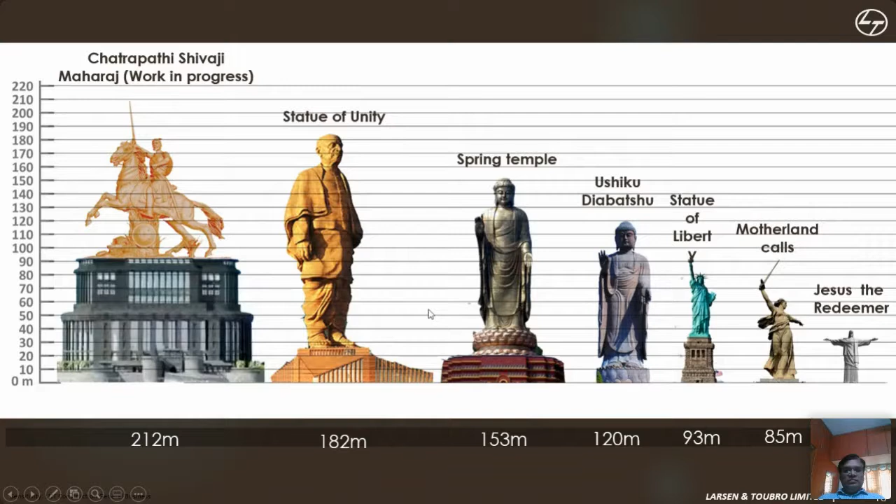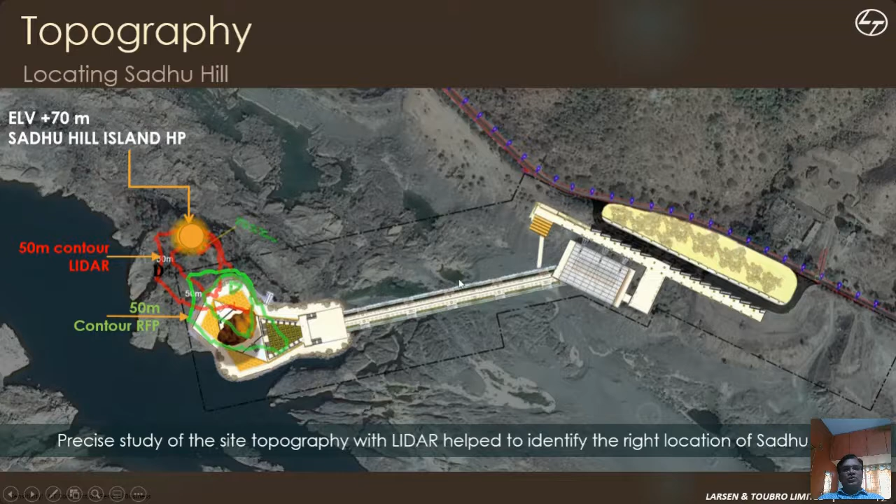When we conducted the LiDAR survey of the entire river bank and the statue, created the record and started looking at the hill itself, as per our survey record it got shifted by almost 45 to 50 meters from the original location. That also posed a lot of challenges for orienting and locating the statue, and aligning the approach bridge with the proper coordinates and orientation. That was a challenge for us to carry out and conclude.

As I told you, the project is not on plain ground. It has hills around these areas, and the dam is upstream. The dam gates were on hold due to various political reasons, so during the heavy monsoon the river used to flood, there was a lot of erosion and uncontrolled river flow. So we have a terrific irregular river bank, and a lot of things eroded like this.

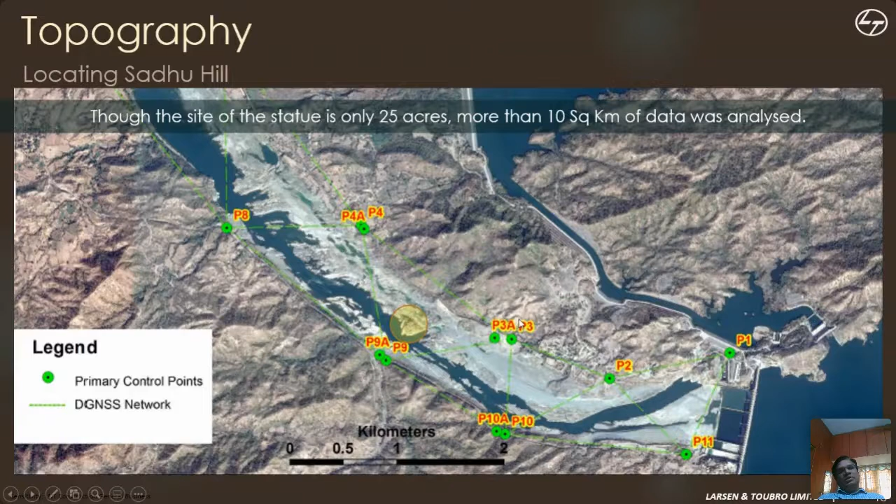So we have conducted a LiDAR-based survey for this entire river bank. Sorry, the site is 25 acres, but we have conducted the survey for almost 10 square kilometers, including 6 kilometers of road. Data was generated, and we arrived at the profile of the river bank, riverbed, all the things.

If you see here, we have conducted a lot of road surveys, because the road was running along the river bank, a topographical survey for the entire river bank, a hydrographic survey and a riverbed survey to carry out the feasibility of boat navigation from the hotel site to the statue site. We have conducted very rigorous surveys, all these different types.

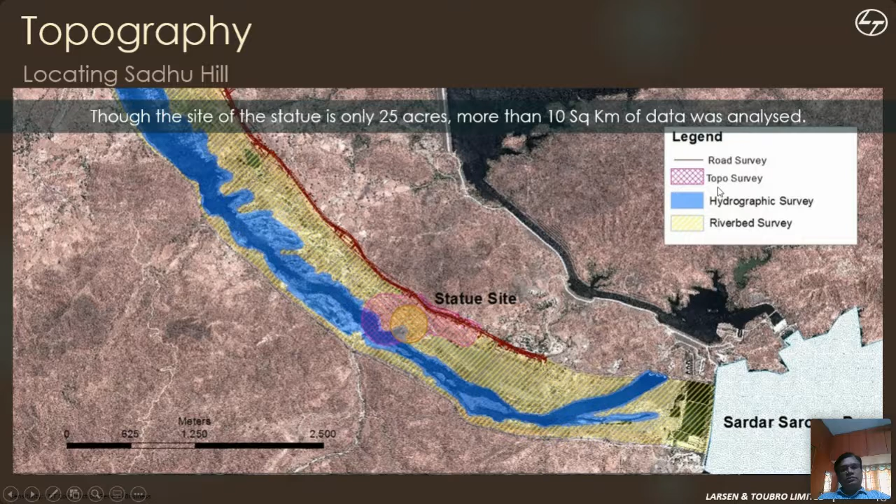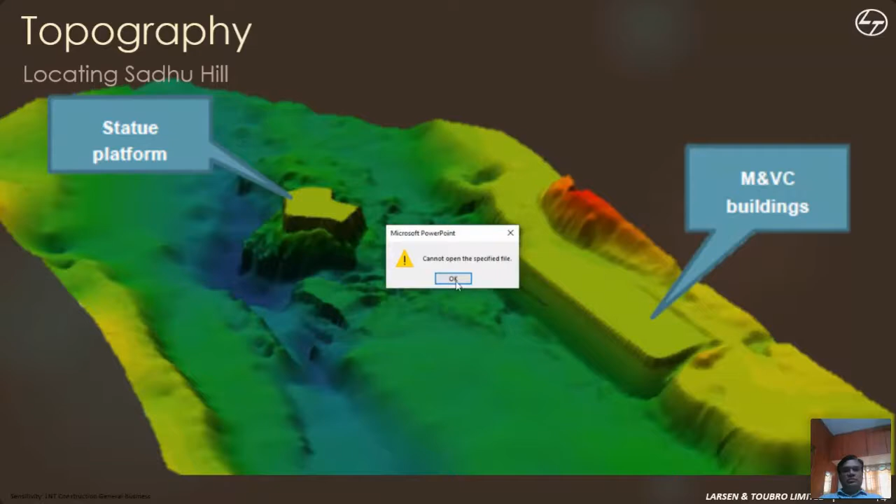In addition to this, another challenge: we conducted a shadow analysis of the statue at various times, so when visitors visit, they should be able to see the face and body of the statue without any shadow. So we did a shadow analysis over a period of time, how the statue will be visible in the daytime for various seasons, in June, September and December, to see whether the statue can be seen without shadow. Otherwise, with shadow, you cannot see and enjoy every profile of the statue.

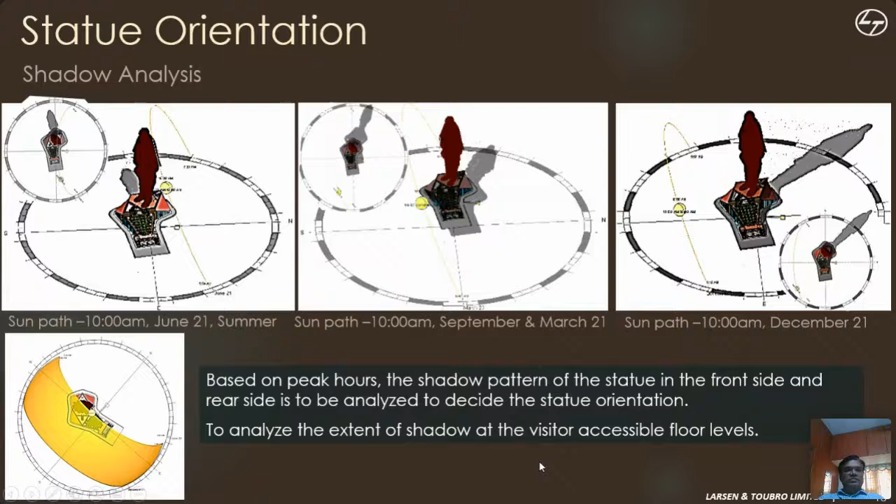Since this is a very sensitive topic, what we are capturing and putting out to the public is not for a few days or few months; it is going to stand forever. So to take care of this sensitivity, we conducted various studies right from August 2014 to May 2017. I will run through these stages.

There was an image presented in the tender document. They selected Sardar Vallabhbhai Patel at the age of 62, even though he lived up to 75 years. That image was suitable to give character to the work he has done, all the things.

Then to support this, you can also see there is a statue at the entrance of the Ahmedabad airport. We scanned that statue, and we created a 30-feet-height statue using the sculptor. The sculptor we selected is Ram Sutar. He is a Padma Bhushan awardee.

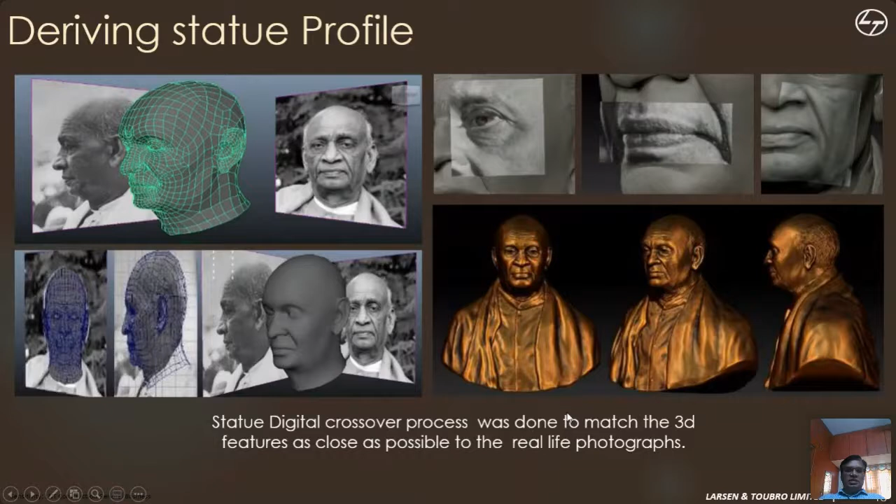We hired them for this special work. You can see the 30 feet statue scan, the original 2D photo, and the Somnath statue - these three compared together.

Along with this, the 3D digital crossover is superimposed to check whether everything fits the image - the ears, lips, nose, and every part of it. You can see all the things verified, discussed, debated, and aligned for the betterment.

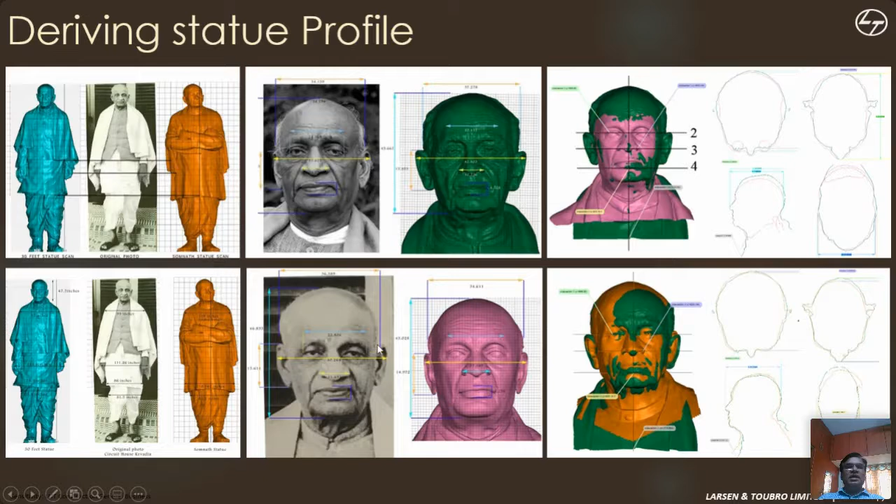So much of the team is entirely dedicated to ensure that everything is perfect.

Some of these stages were undergone for the faces. You can see Ram Sutar standing near this 1:5 face markup. This is a 1:5 markup - you can see that if expanded 5 times, what is the height of the head itself, the actual head, shown in this 1:5 scale markup.

The person is standing nearby in the left side image. So from the original to this refined version, the eye size, nose, lips, and ears - whatever is seen - every care is taken for refinement.

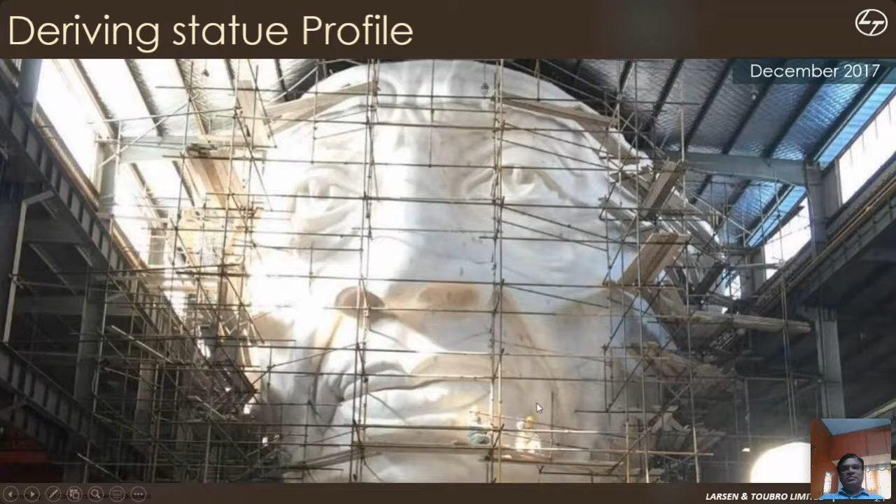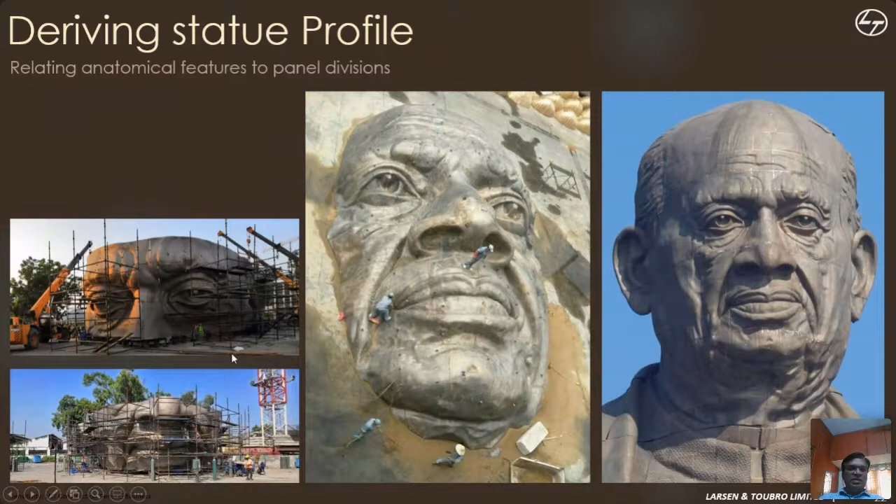This is the FRP true scale markup carried out in the workshop in China. This is the real size foam markup, and you can see this from foam - they derived and took out the face element. You can see this with the human height, and some of the locations you can see how it looks.

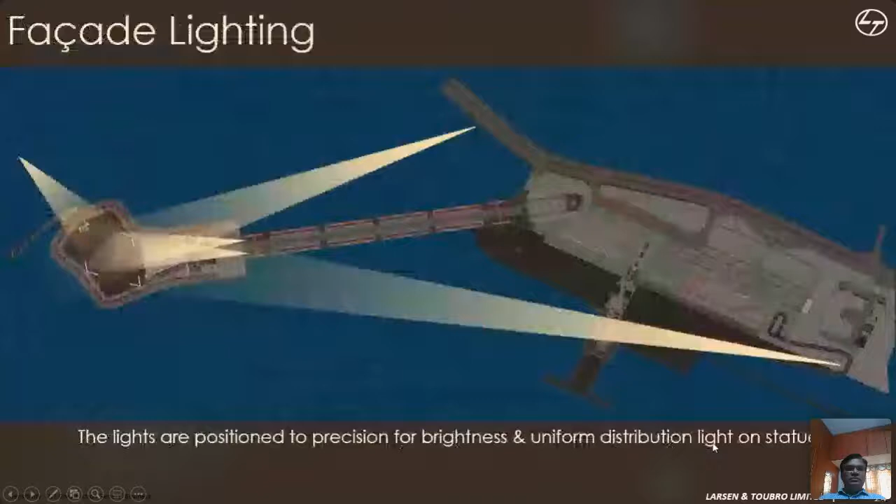This is another one of the activities, such as the Mammoth height statue. Also, we want to lit during the night time. So you would be able to see this light location we identified. You can able to see the light array is coming from various spots, even 500 meters away from the statue, so that it will reach the full height of the statue, to get the uniform brightness of the statue.

These are some of the views. We have put this focus light, the various intensity, and as I told, from 450, 500 meters away, to get the uniform light over the statue without any shadow, in spite of so many projections and parts over the statue body.

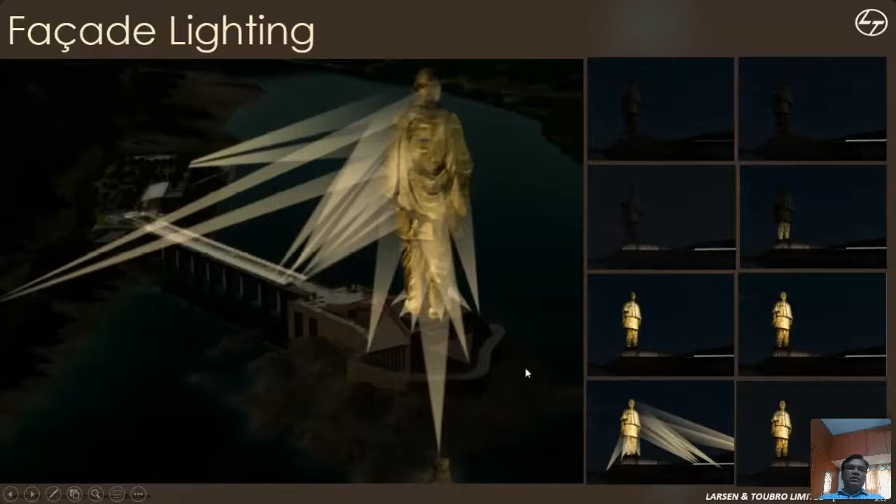So this is one of the views, this is during night time, with in addition to this the facade focus light. So you are not able to see where this light and all source is coming from, but you are able to see this statue in full, very clear, without any shadow.

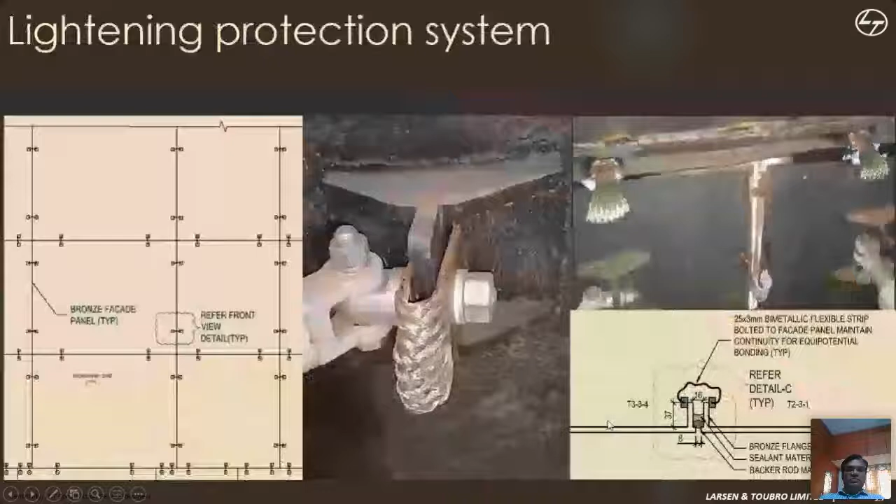See, this statue, this outside skin is almost like 23,000 square meters of metal area. That too, we have put it on this hill surrounded area. Maybe this hanging clouds and the lightning effect may be very critical for the statue. So that's why we have done lightning protection of the statue, even though such a metal exposed area is there, almost 22,500 square meters. These are all connected and well earthed.

So even if people are touching during a lightning strike, they will not get affected. Within a fraction of a second, the current will connect to the Mother Earth, so that the people inside will not get affected. This is one of those small issues, but it is like a high risk potential. We have taken extreme care connecting all these panels and earth to the Mother Earth, so that the occupants or visitors should not get affected during a lightning strike, if at all anything strikes.

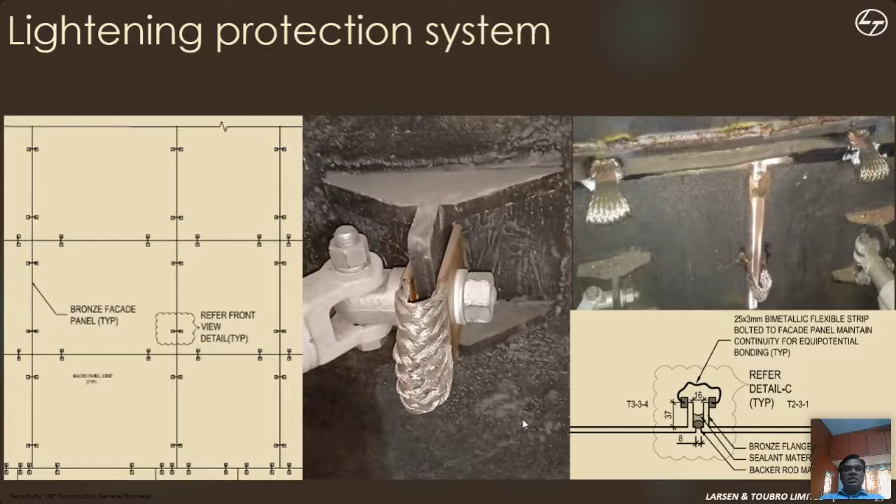And also in hot climate, if the ambient temperature goes up to 40, 45 or so, such a large metal area will attract a lot of heat, and the space inside, the entrapped air may get heated up. We have done a CFD analysis that showed if entrapped air is there, the heat may go up to 85, 90 degrees Celsius. So you can imagine if visitors are inside during a summer day, how they would feel.

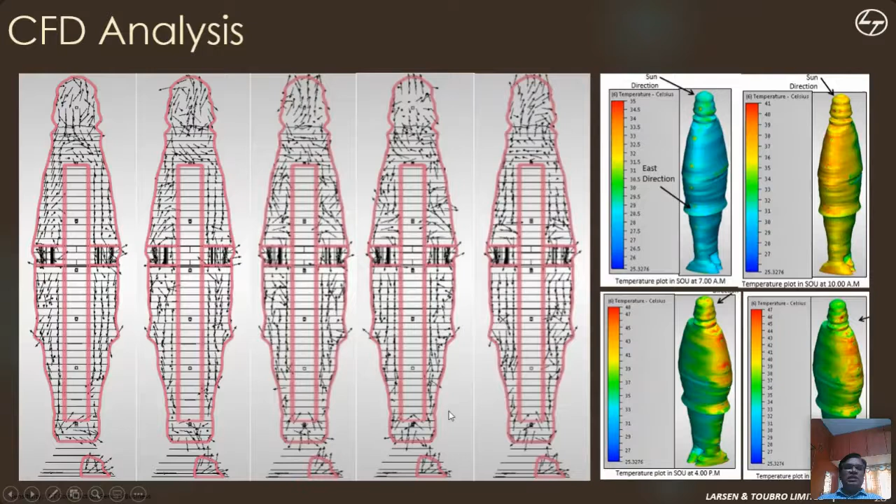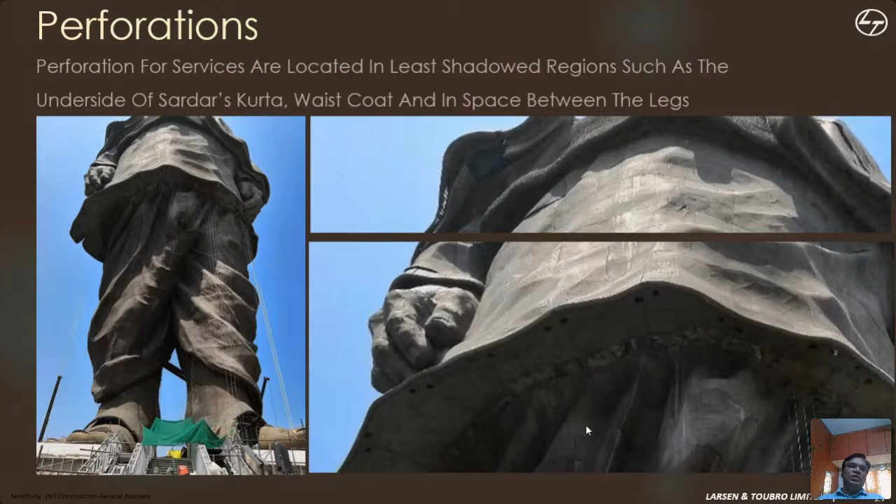So what we have done is create some kind of vent at underneath, and also vent at the top wherever possible, so that there is a natural draft, so the air can enter below and escape at the top. Wherever the fold is underneath, we have created some kind of perforation under the fold and elsewhere, creating natural air entry, so that hot air gets lifted up and goes outside through the ear or nose or near the top head level. That kind of analysis is also carried out.

So further to that, I want to mention this project is designed for 15,000 visitors per day.

The viewing gallery is located at the 153 meter height chest level, with a capacity of almost 2,000 visitors per day anticipated. It is designed for earthquake resistance and wind load up to 180 km/h speed.

To reach this viewing gallery, we also provided two high-speed lifts of 4 meters per second, one in each leg, connecting from ground level to the viewing gallery level.

As I told you, this left side photo shows the hill. Because a natural hill needed to be cut off terrain, we also had to investigate whether the soil or rock is suitable for putting such a gigantic statue.

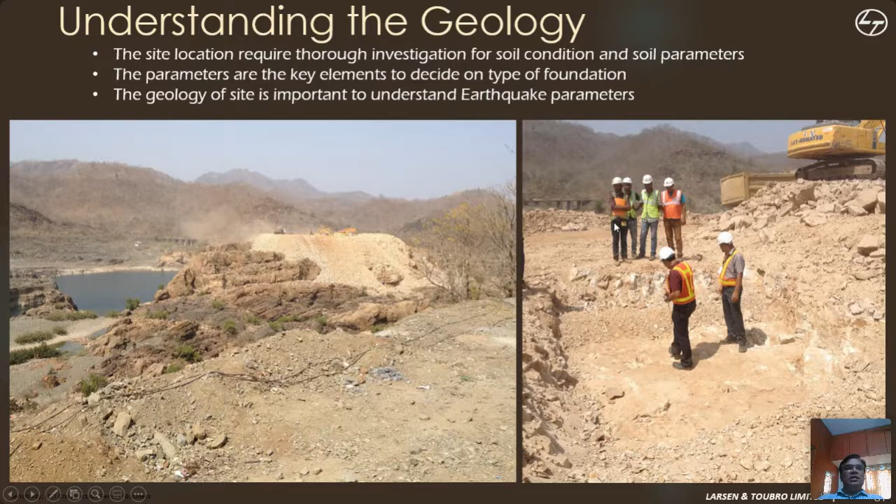Also, this zone comes under earthquake zone 3. So we conducted a very detailed geotechnical investigation with a lot of boreholes, more than 60-75 meters deep, and also some cross boreholes to understand the underneath layers and how they transition from one to another.

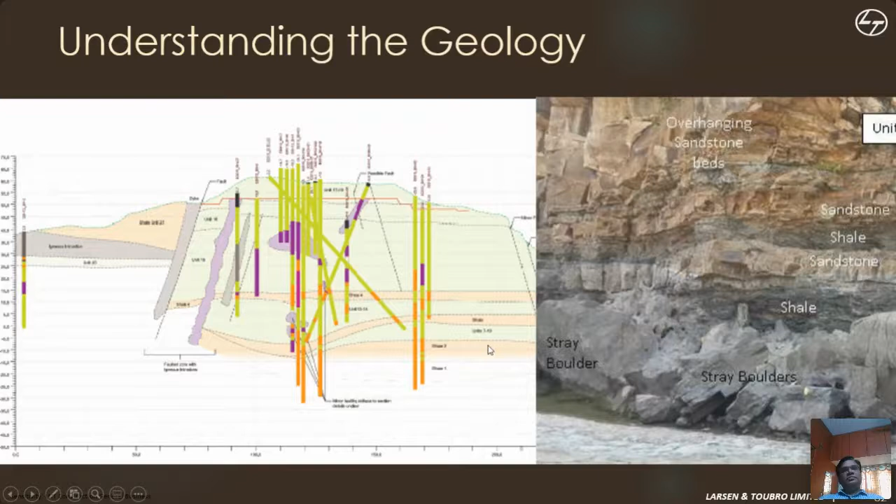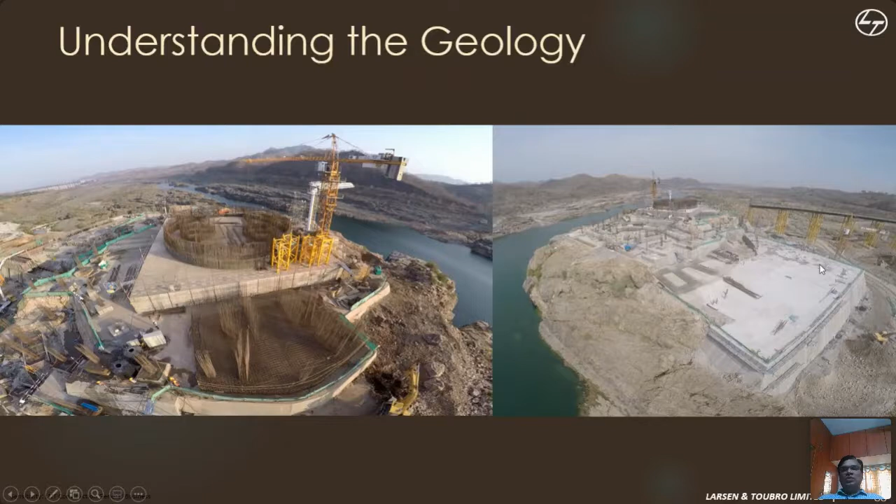Since this is a monument structure, the design life anticipated is more than 100 years. To meet this design life, the type of material used, cover to concrete, reinforcement, grade of steel, and all such things were taken with extreme care, along with whatever durability tests were required, even during construction, with necessary precautions taken.

One example is for the raft concrete, we lowered the pouring temperature itself by adding ice, so that the heat of hydration should not create unnecessary internal thermal cracks. This entire mass is monitored and insulated with insulation material to avoid temperature differences. Extreme care was taken in all these things.

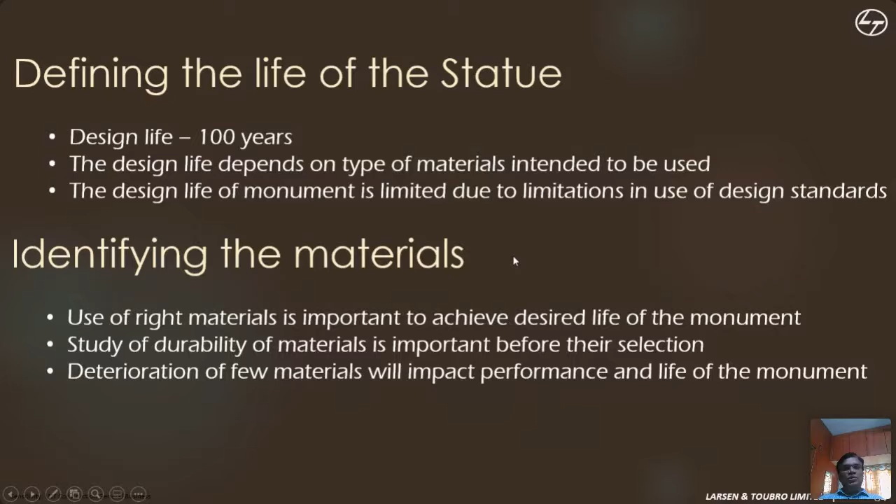I'm not getting into all those construction-related things, otherwise with the short time available, it would be very difficult to capture everything.

The design parameters followed for this project: for seismic, the project comes under zone 3, however we designed for zone 4 to create an additional factor of safety of 1.5. For wind, as per code it is 39 meters per second wind speed, however the project is designed for 50 meters per second to create another factor of safety - in addition to the regular factor of safety, we created another 1.71 factor.

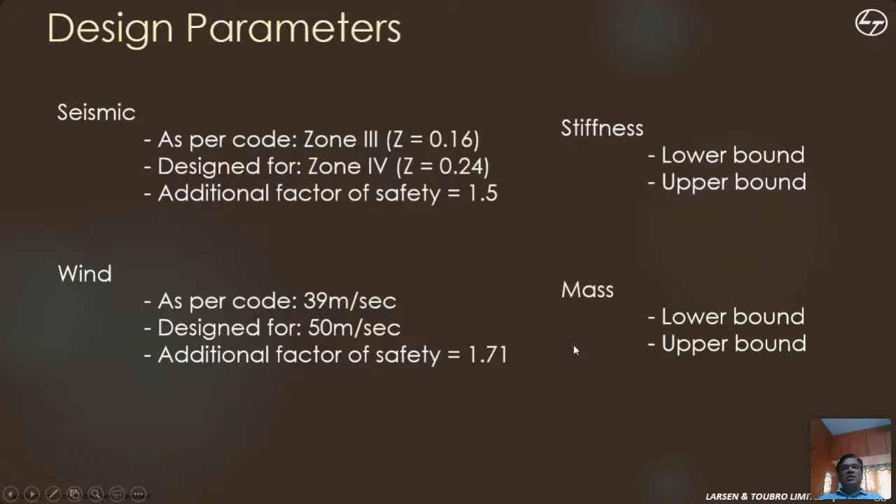We also did a rigorous analysis using finite element analysis - lower bound, upper bound stiffness, risk analysis, so that nothing should go wrong. Similarly for mass, lower bound and upper bound were calculated for wind analysis. This kind of risk analysis was carried out to ensure the structures would not be at risk due to extreme seismic, wind, or any event.

Normally the code gives wind load for regular conventional structure profiles, either square, rectangular, or circular. For a human body like this kind of irregular shape, it's very difficult to define what kind of wind pressure comes over the structure. So we conducted a wind tunnel study.

This model was developed at 1:400 scale with the surrounding environment within 500 meters, including all bridges, surroundings, the riverbed and everything. It was put in a wind tunnel and tests were carried out for every 10 degrees using a rotating table that can rotate at every 10 degree increment, for different orientations of wind. The test was carried out for structural loading as well as facade - facade meaning the external pressure that needs to be considered for designing the entire skin.

For various elements of the statue, the foundation is M60 grade concrete, and other concrete varies from M65 to M40 used in this project. We used structural steel of E350 grade, and the bronze cladding is 8mm thick, made of a bronze alloy as I told you.

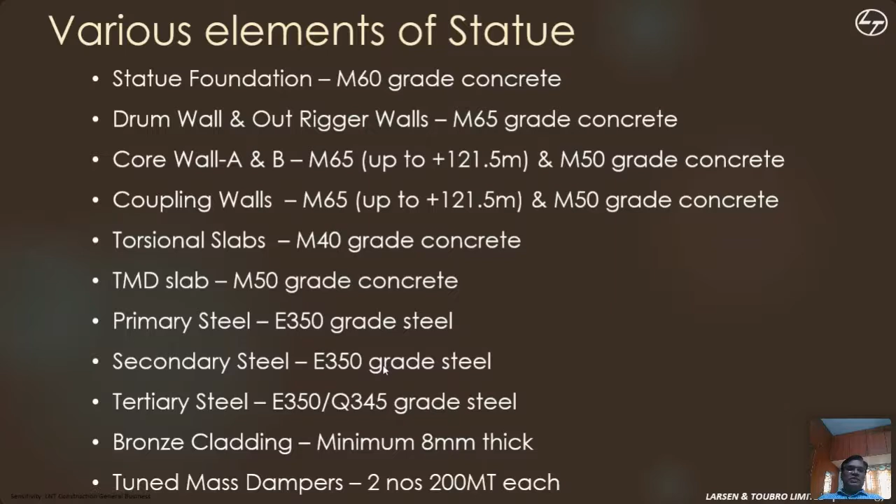Yeah. This is the statue base. Yeah. Dinagaran? Please, you can go ahead.

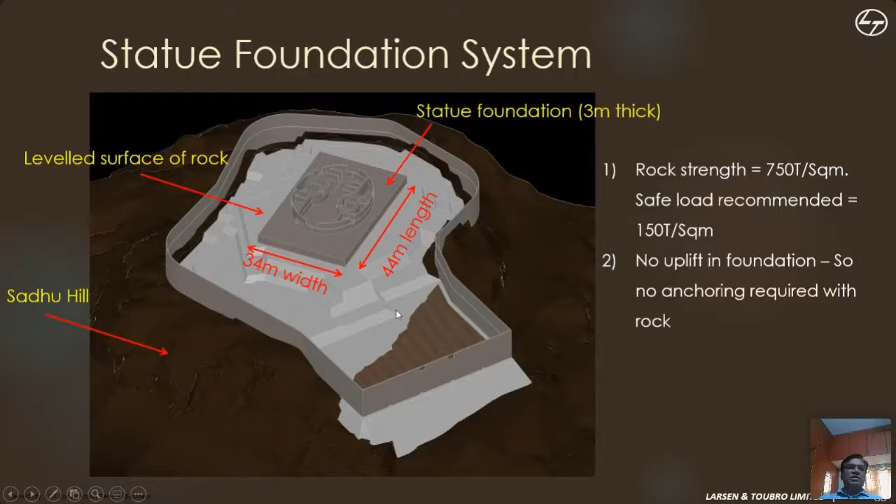Yeah, fine. Yeah, this is a statue base. This is the raft foundation of 34 meter by 44 meter, and this base structure with the retaining wall. This is located with reference to the hilltop, with a bearing load of 150 ton per meter square. This is what we established during the geotechnical investigation.

Because when the statue sways or leans due to the lateral load, the outer skin should not act one above another. It should not get into compression and tension. We have created a defined gap so that this skin will not get unnecessary additional stresses. So that's why even this steel structure is not continuous.

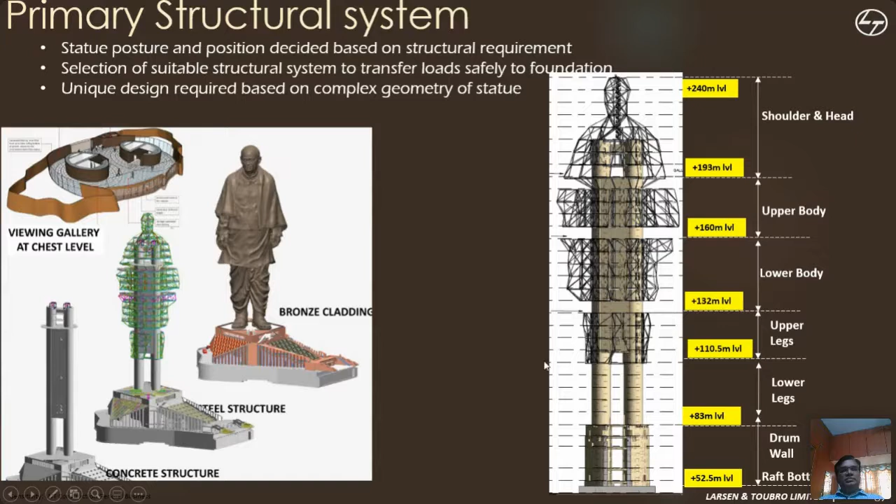The left side view is this drum wall, where the 2 cores are interconnected with the bigger elliptical outer core for better rigidity. We have created this up to the 83 meter level. Above 83, we have 2 elliptical cores, one core in each leg. We made the core itself elliptical so that it will fit into the ankle of Sardar Patel. It houses 1 lift and 1 fire escape staircase.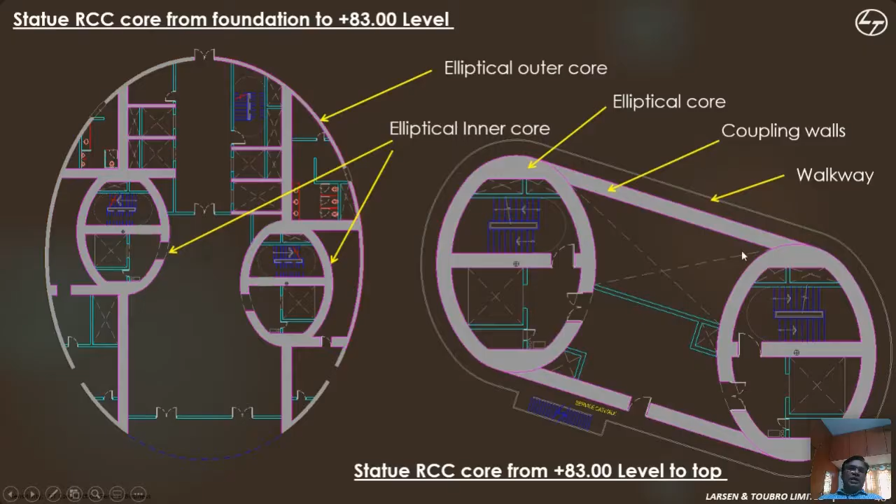The lift moves at 4 meters per second to reach from ground to the viewing gallery. These are all concrete elements. So in the central view, it starts from 58 meter. Up to 83 there is the statue base and drum wall, above that the independent cores, and it goes up to the 240-meter level. These are the project reference levels. From 58 meter to 240 is 182 meter.

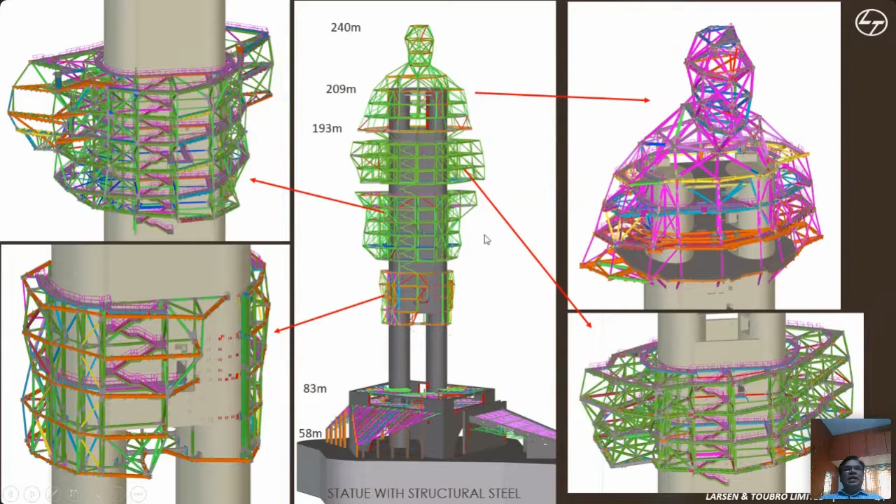So you can see how this steel structure is created, including the head portion. Within the head skin we have created the steel structures. Such a complicated, non-orthogonal, irregular pattern. Erecting and aligning it in space is a big challenge for us.

So this is one typical section of the statue profile. The width, the front elevation, is almost 60 meter, and the depth is almost 40 meter average at the maximum chest level, with 2 cores inside, and a connecting wall and connecting slab so we can go from one core to another. This outer profile is not orthogonal. Everywhere there is a fluidic form.

So you can also see this. We placed a tower crane inside one of the cores, and also added another tower crane outside, braced with the concrete core, for erecting the steel and the skin. And erecting and removing the tower crane itself is a big challenge.

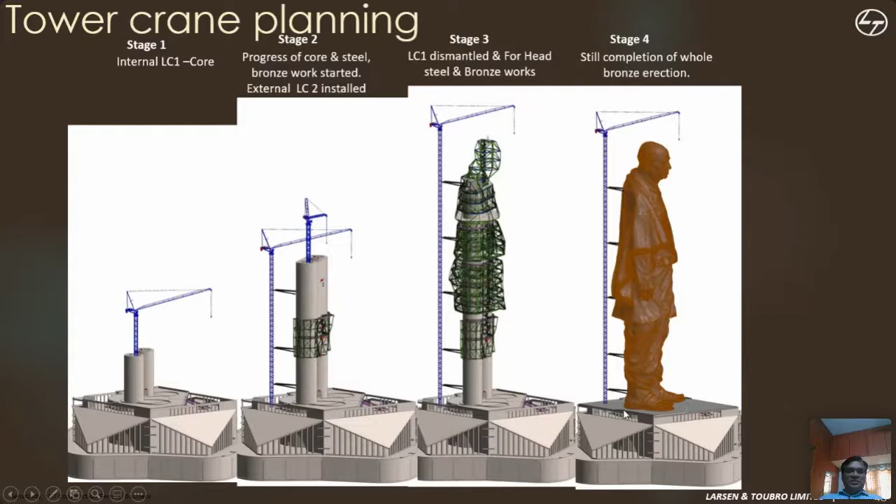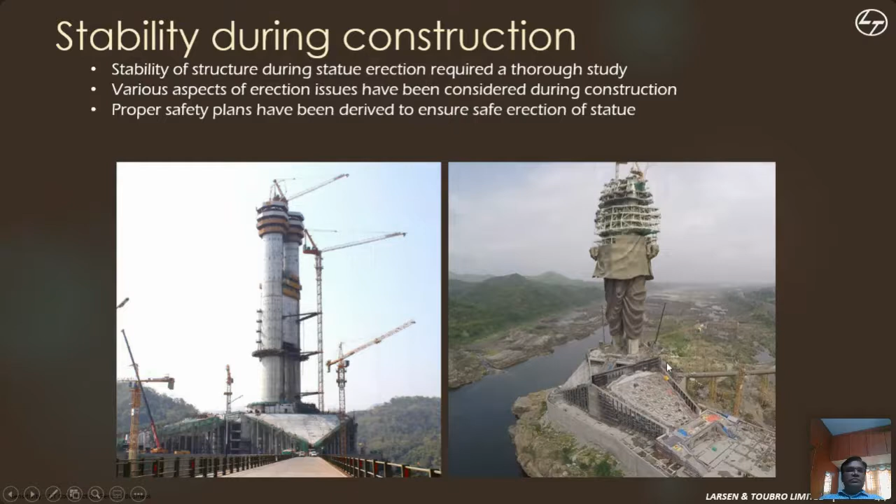If you see any other statue in China, it has a small slit opening, but we have created this very large opening, so those who get into this viewing gallery are able to see the surrounding hills as well as the dam and everything. On both the front side and the rear side, we have created such nice, large viewing glazing areas.

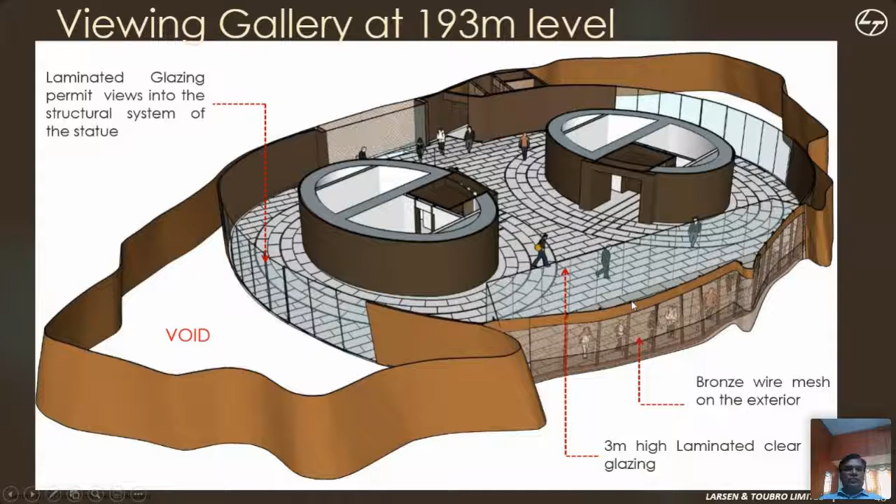See some of the views. We also created this, which is like the skin jolly. On the right side, if you see, there is glazing, and the air-conditioned area is inside. So we have created an exterior atmospheric feeling. If you come here, you can also feel the outside air and everything. You can experience that kind of outdoor environment we created at the 193-meter level too.

And you can also see on the left side the jolly we have created. At human viewing level, eye level, we have created a bigger jolly. At the top and bottom, we have reduced the size so that it merges with the outer skin. So obviously it will not get noticed at the chest level, because it doesn't create another hole kind of thing in the human body.

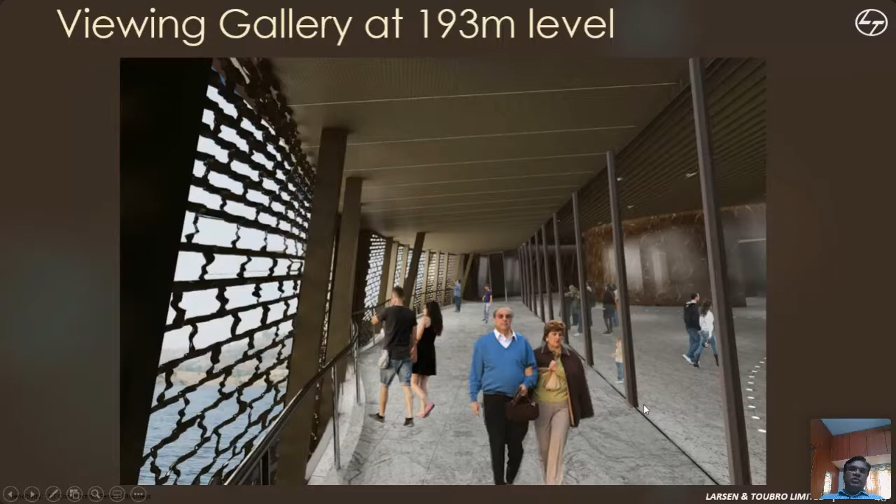We have taken a lot of care and we created a mock-up of this jolly for the visual aspect, and it's nicely done. This is one of the greatest things in any statue, such a large area for people to see outside. All other statues have very small vents for looking outside. You can hardly notice it from the ground. You cannot notice these viewing galleries at chest level. We have taken extreme steps to camouflage them within the outer skin.

As I told you, the bronze area is almost 22,500, equivalent to almost 3.2 times a football playing area. You can imagine such a large area. It is all cast in micro panels of size 1.83 by 2 meters. Eight to nine panels are grouped together as a macro panel, attached to a backside steel frame for handling, and assembled one above another.

I'll also show you. We have done a lot of tests to validate the quality of the bronze to ensure the quality is consistent, because this is a very sensitive alloy material, 8 mm thick, and it is sand cast. So a lot of sensitivity is attached.

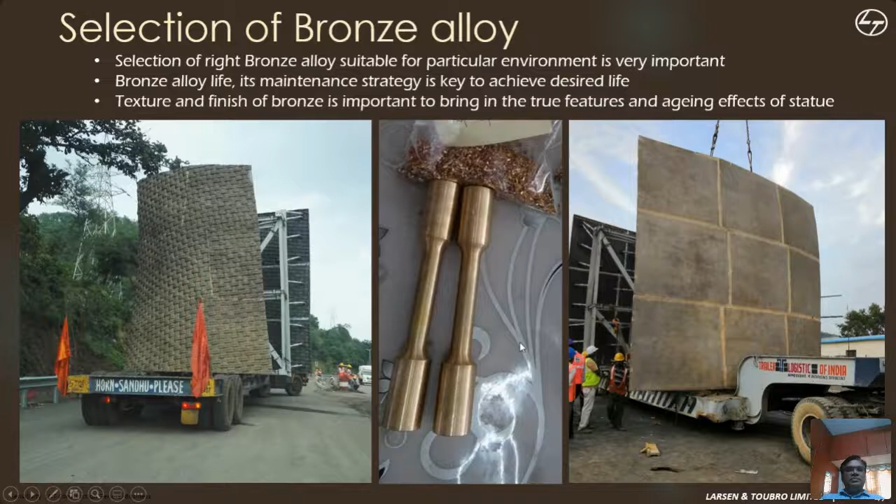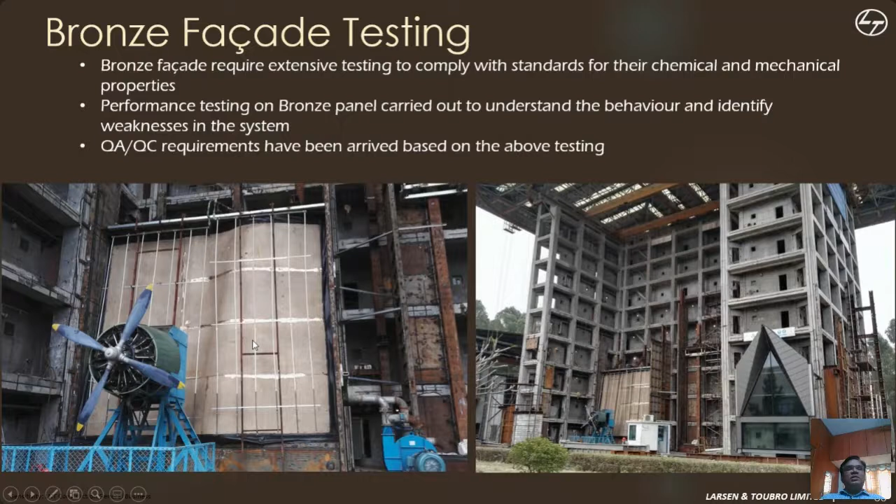Because this is a new material with an irregular pattern and different support arrangements, we conducted a full-scale test in China to study the behavior of the skin, the internal support arrangement and everything.

This is the panelization of the entire body of the statue. It has almost 550 macro panels of size 5.5 by 6 meters, and the cast panel is 1.83 by 2. So each macro panel has almost 9 micro panels. So you can imagine, almost 550 macro panels with an average size of 5.5 by 6.

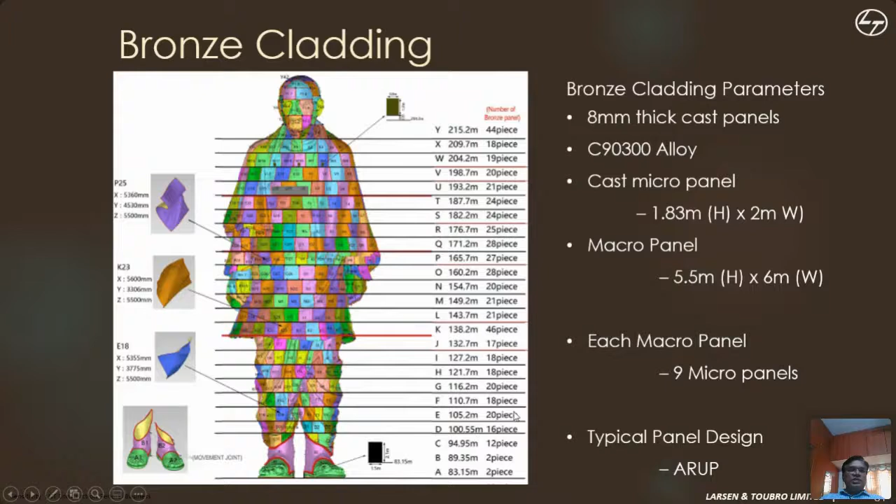This is how the entire panelization is done on the statue. If you see, this is the front side, then the rear side, the back side and everything. Even the face, how it is divided and assembled, you can see all of it here.

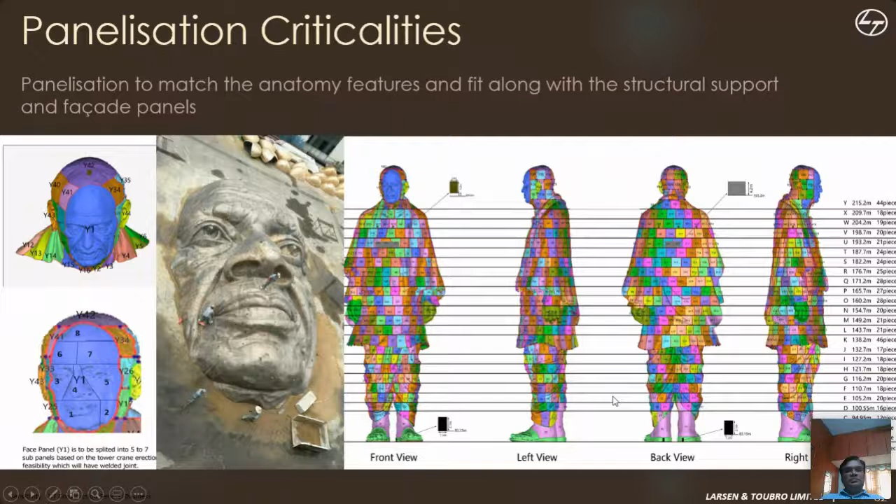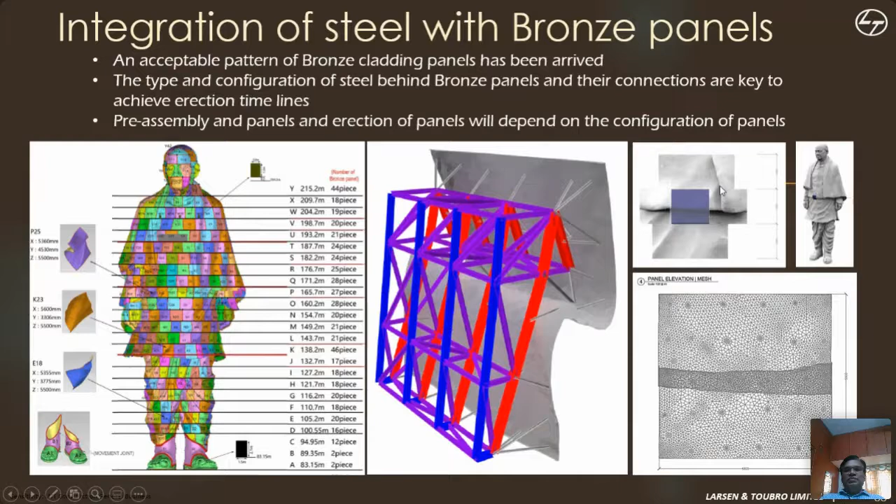As I told you, this is the micro panel and macro panel; this is one macro panel. It is connected with turnbuckle arrangements like this. This is the skin, the turnbuckle arrangement, and you have the backup steel frame. So this is one panel, made into pieces like this. This is the location of the interface of the top cloth to bottom, identified like that.

So you can see the skin with a turnbuckle arrangement of the prop, then the structural steel base. You can see here a closer view. This is a bronze panel. There is support, a turnbuckle arrangement to adjust this prop, and the steel frame inside. And also you can notice the junction between two panels has a return, with sealant applied here with the backer rod, so that water will not enter inside the statue.

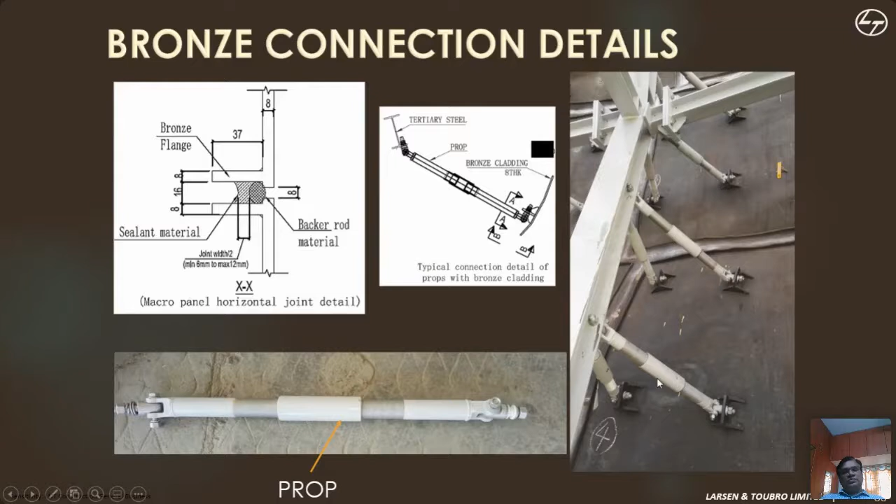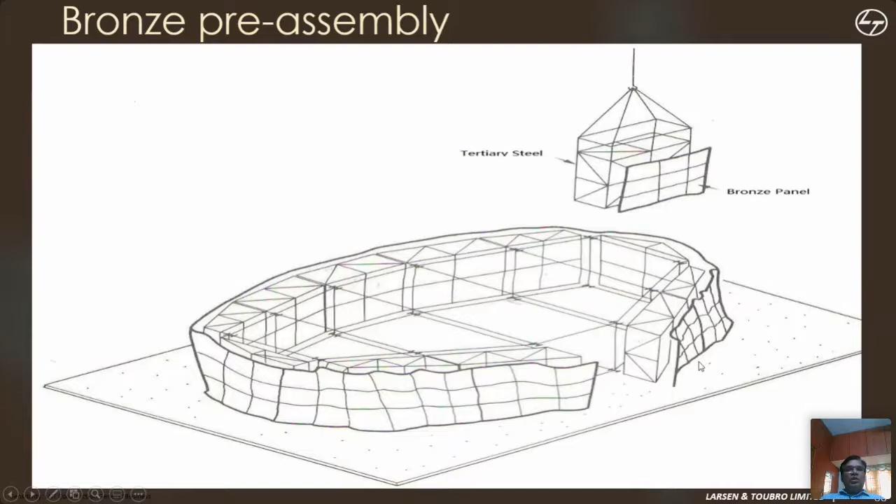As I told you, this is one ring of this panel. What we have done is, first the bronze micro panels were assembled into macro panels, with the prop support and steel frame assembled at the ground with all the survey marking, checking whether it's fitting or not, all checked at the yard itself before lifting and erecting in position.

You can see here this is on-field assembling. Each macro panel is aligned adjacent to each other with the actual profile of the statue and checked and verified for alignment. If any modification is required, it is carried out at the ground level itself, and alignment is done. After that, one after another, they were lifted, transported and erected in position.

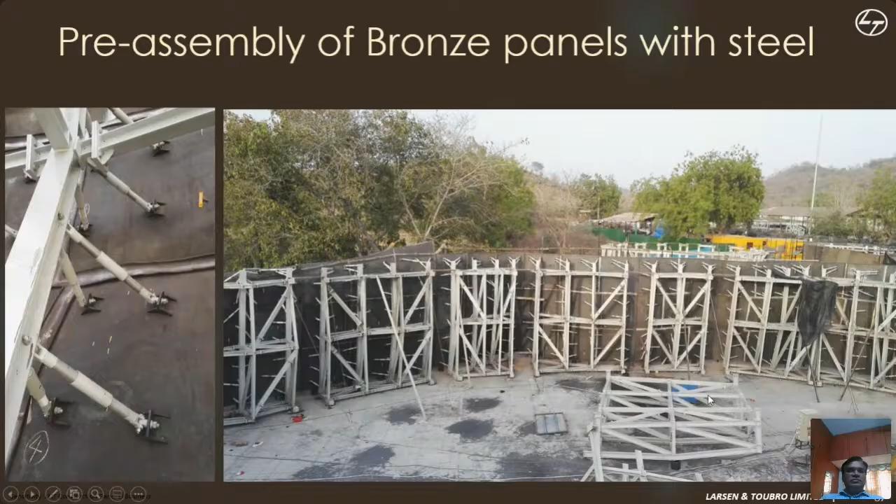As I told you, we have done two tuned mass dampers. Each is 200 tons, mounted just below the head level, at the top of the core wall. This is a hanging mass. The system is tuned to the statue's natural frequency, so that when the statue starts swinging in one direction due to lateral load, the hanging mass swings in the opposite direction, counteracting the natural loads. That's how the tuned mass damper is designed. Two, one over each core, were designed and installed to control floor vibration, for human comfort, and to give additional safety to the structure.

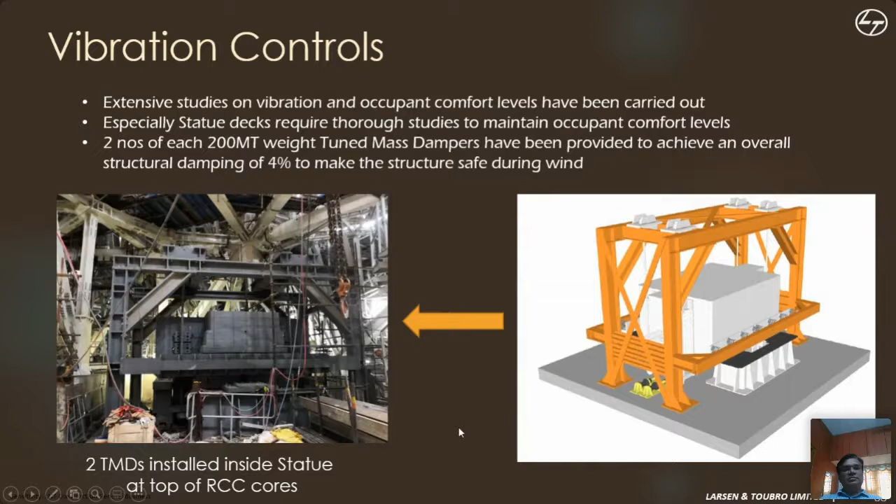In addition to that, we have installed a lot of triaxial accelerometers, temperature monitoring instrumentation, digital inclinometers, and surface mounted strain gauges to monitor the behavior of the structure.

Just a minute. Hello. Yes, sir. Yes, sir, I'm in the middle of things. I accepted 12:30, sir. We'll have it. Okay, correct. Hello. No issues, sir. Sorry, sir. Some important call has come.

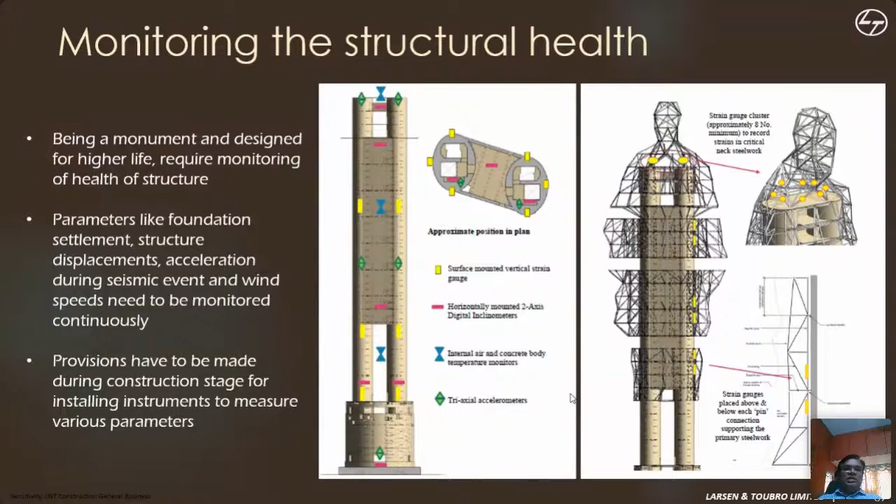So we have also done a lot of instrumentation in the statue to monitor its behavior during wind and seismic events. That's connected to a central server, and it is monitored, so they can understand the level of deformation, stress levels, and if any abnormalities are happening. All these things can be monitored.

In addition to wind load and actual loads, we also studied accidental loads like bomb blast and small aircraft impact. All these studies were carried out to see how safe our structure is. For these accidental loads we also studied and discussed internally with the client how our system is resilient to these kinds of accidental loads.

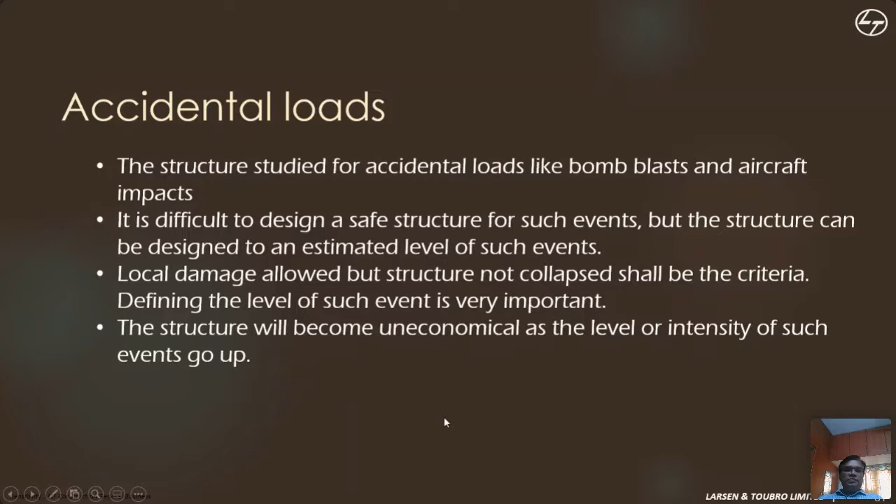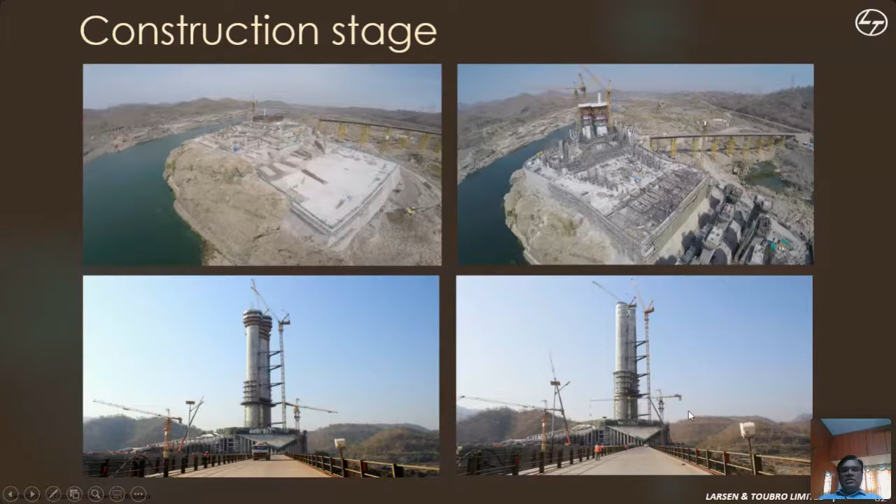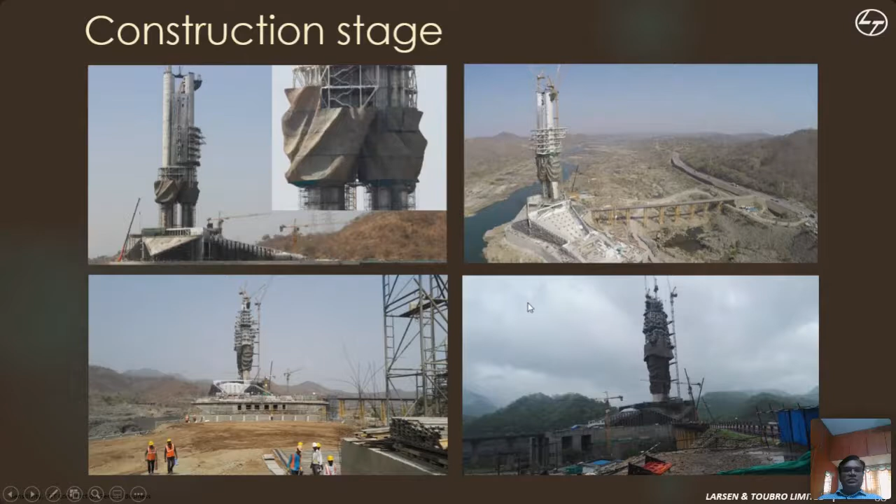These are some of the construction stage photos. You can see the left corner is the terracing level of the statue base, some of the core in progress, the core midway at the left side corner, and the steel work just initiated at the base level. In some of the other photos, the lower level bronze panels have started being erected, with the steel progress, and some progress views of the statue.

These are some more additional works carried out. At the right side bottom, you can see the bronze is erected up to the neck level.

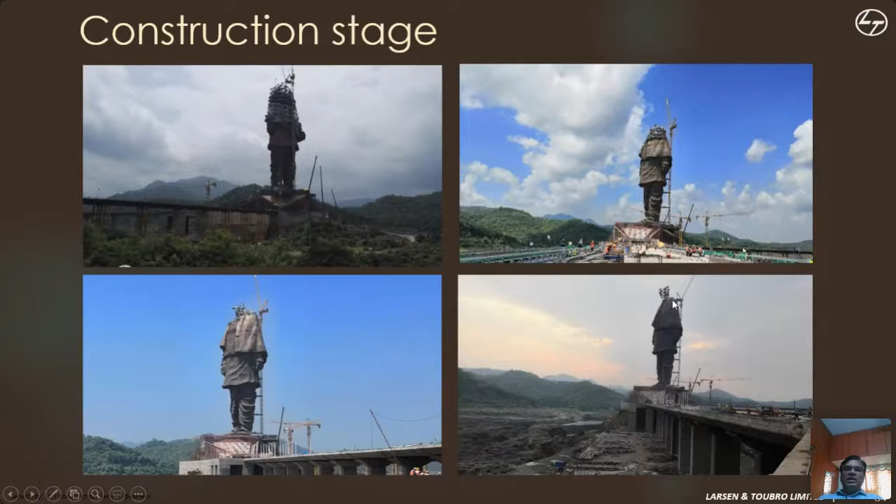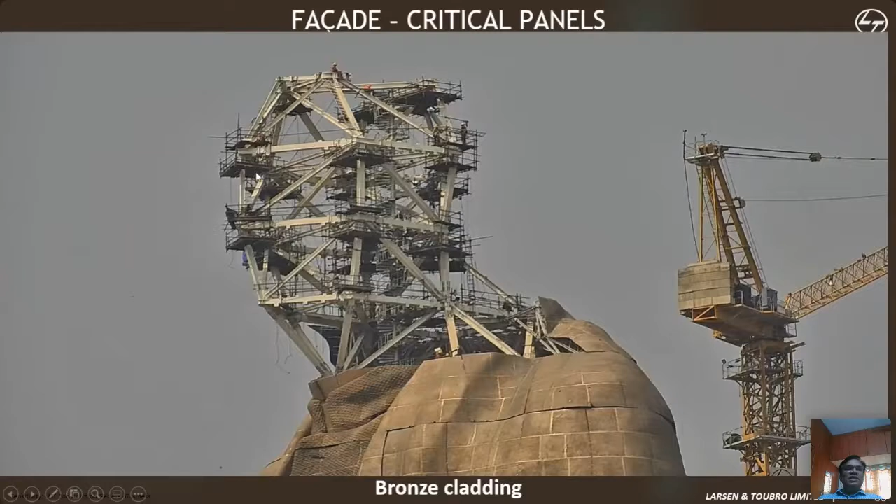You see here, this closer view of this photo shows the bronze with the steel. So you can see how the steel is coming out of this for the head, the actual human body. So these are all nodes. They have supporting platforms for checking, welding, and other things. Otherwise, it is only steel frames.

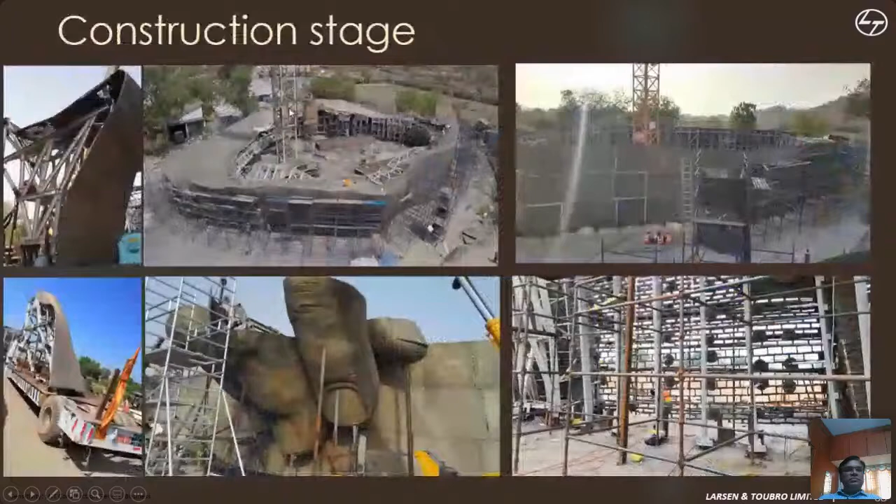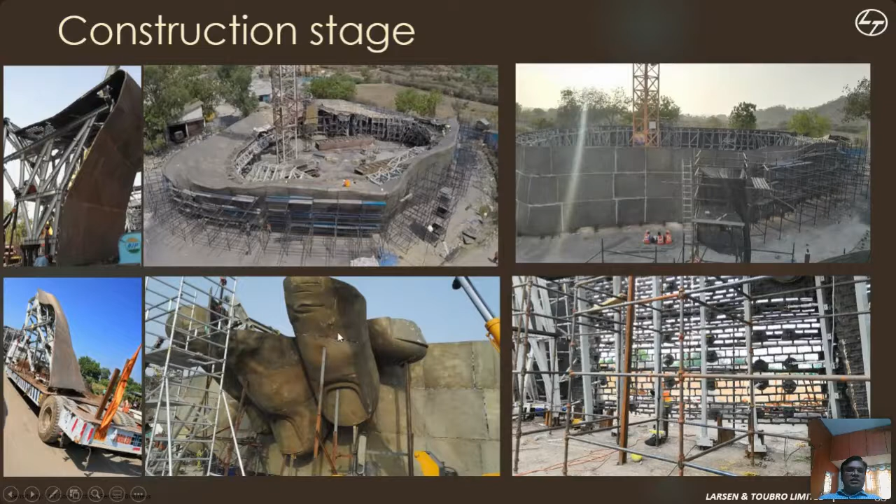Yeah, so already I have shown these kinds of panels assembled at the ground level in multiple zones. These are some further views of the panels. On the right side the jaali is erected here, and the hand fingers are seen.

So with this, I am closing this presentation. I also have one small 7-minute video. Can I run it now, or is there a question and answer session?

Sir, thank you so much for your wonderful presentation. We were wondering how this much analysis would be done for this. We have learned a lot from this. Simply by seeing a statue, a lot of analysis has been done. First of all, I congratulate you for your wonderful contribution. Thank you, sir. 10 minutes. So let us have some questions.

Yeah. Okay. I have a 7-minute video. Can I run it now, or after the question and answer session? Please, you can. Yeah. Dinaran, is it coming?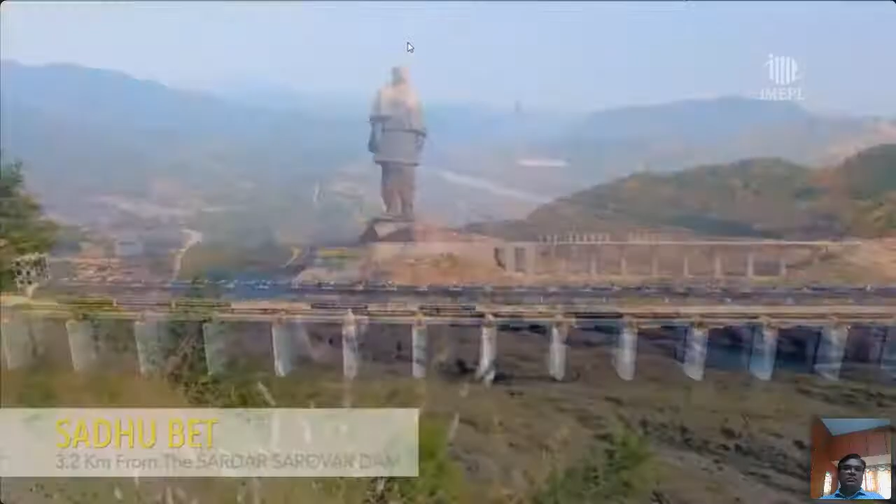On 31st October 2013, Shri Narendra Modi, the then Chief Minister of Gujarat, laid the foundation for the tallest statue in the world, the Statue of Unity. In keeping with its ethos, L&T took up the challenge head-on. Located on Sadhu Bet, 3.2 kilometers from the Sardar Sarovar Dam on the Narmada, the Statue of Unity is an unparalleled confluence of engineering and art. Although L&T had successfully completed a plethora of prestigious projects, including power plants and commercial complexes, a structure of such scale was one of a kind.

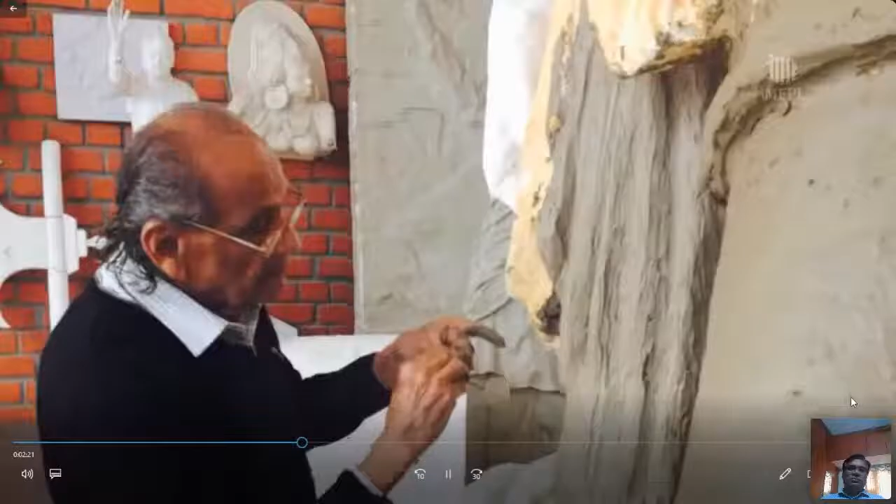The honor of sculpting Sardar Patel's likeness went to Padma Bhushan awardee Shri Ram Sutar. The first challenge was to select an apt pose and expression to do justice to him. Although L&T's role was that of an EPC contractor, they still took active interest in the selection process. Extensive discussions with historians and experts ensued. After sifting through thousands of photographs, the team was unanimous in how the statue should look. Shri Ram Sutar created sculptures in varying sizes, honing every detail again and again. The latest 3D scanning techniques and computer-controlled production ensured accurate reproduction of minute details.

Immense statues the world over have a broad base to achieve structural stability. Sardar Patel's statue was slated to be the tallest ever, and the greatest task was to achieve the design. His dhoti needed to end above the ankle. He is in a walking stance, thus the feet were not parallelly aligned. The assertive stride meant a gap between the feet, but the L&T team was equal to the task.

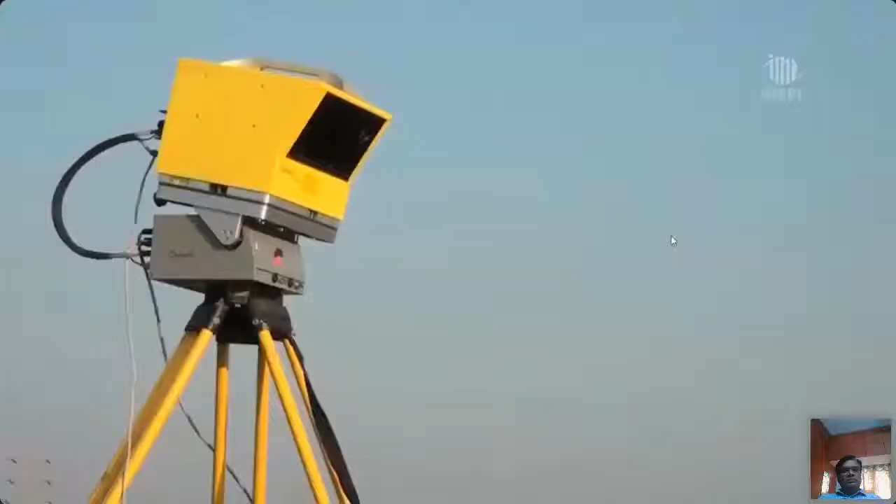Operations commenced in 2013 with exhaustive surveys of the land, riverbed, river, and wind. This was followed by critical engineering design, a test of L&T's experience and technical capability. In such a remote location, planning and logistics would be the key to all the operations.

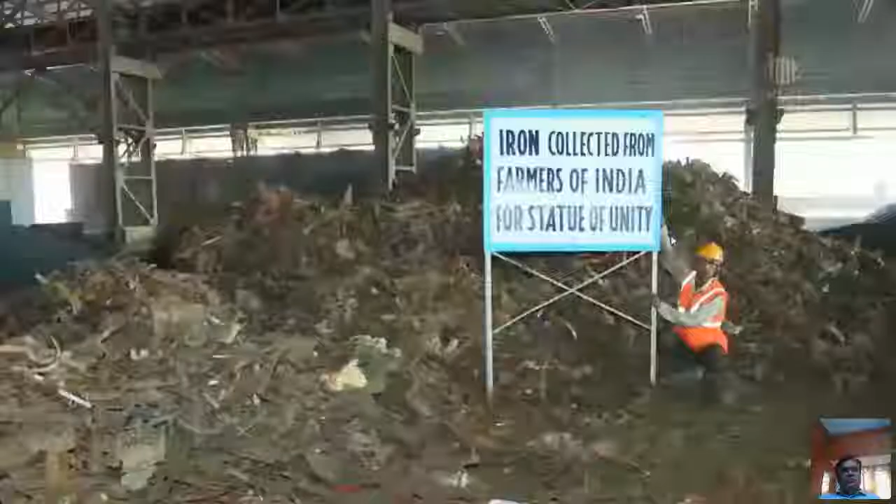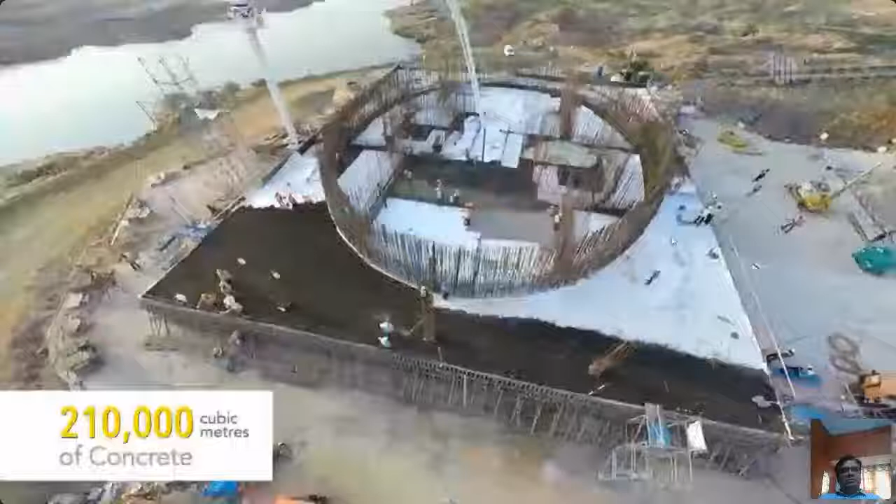The Loha campaign was launched in earnest with a view to employing used implements donated by farmers around the country as a symbolic tribute. This iron forms the steel rebar in the raft foundation, a homage to the Iron Man of India. A reinforced concrete core, created with critical concreting methods, gave the structure a stable base.

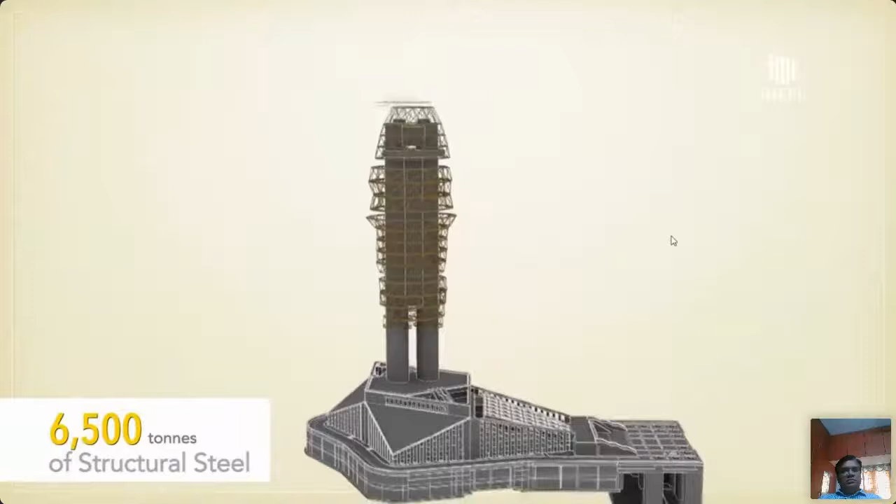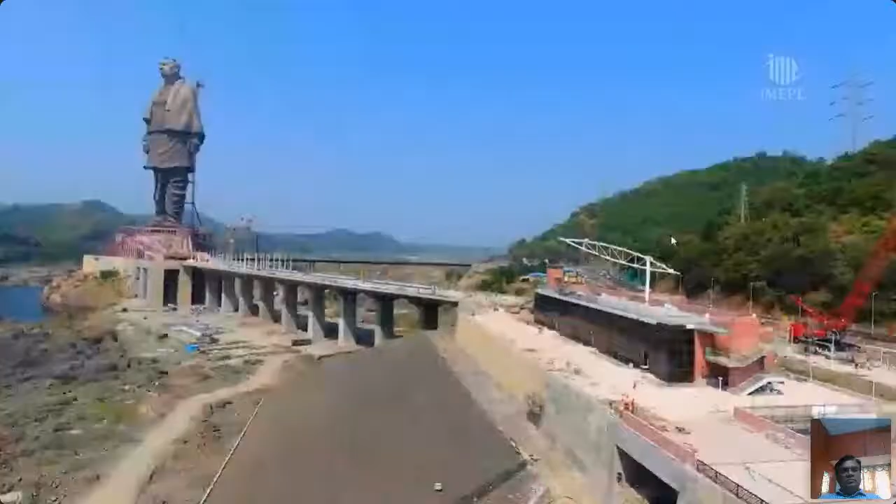This would support the primary and secondary steel trussing. The bronze plates then covered the entire structure, forming the sculpture. Locally available sandstone and Banswara marble has also been used. Besides the statue, other key elements like the memorial and visitor center, main access bridge, bridges and roads were made to precision.

The Shresth Bharat Bhavan is a 3-star facility for the tourists and guests. To bring socio-economic development to the region, students and vendors from nearby villages and towns were also trained for the project, thereby generating ample employment. The ultra-modern BIM technology for the design and project monitoring brought synchrony between the team and 30 consultants globally.

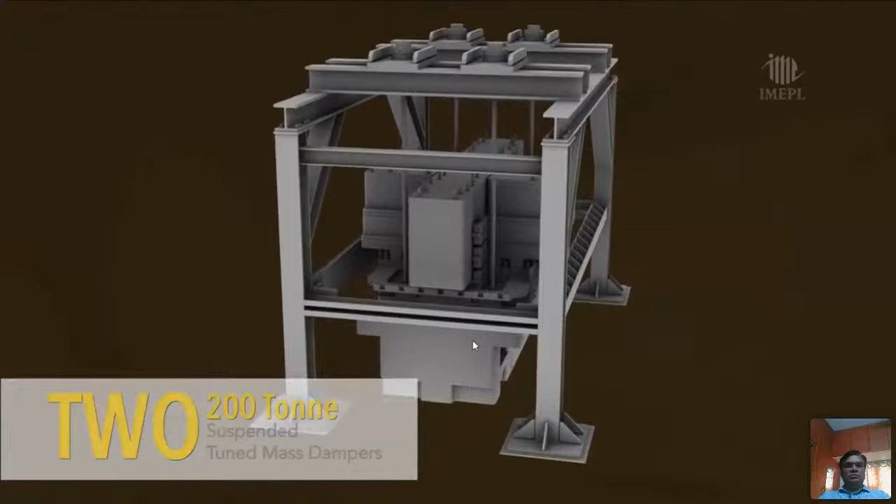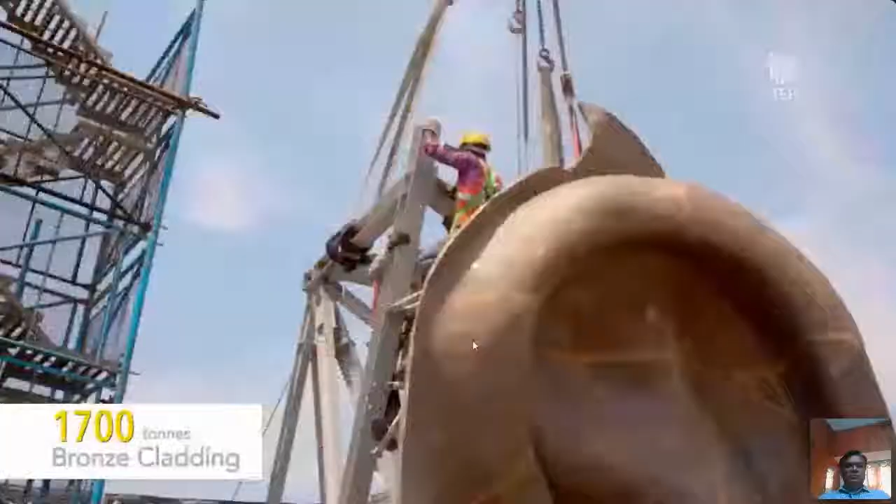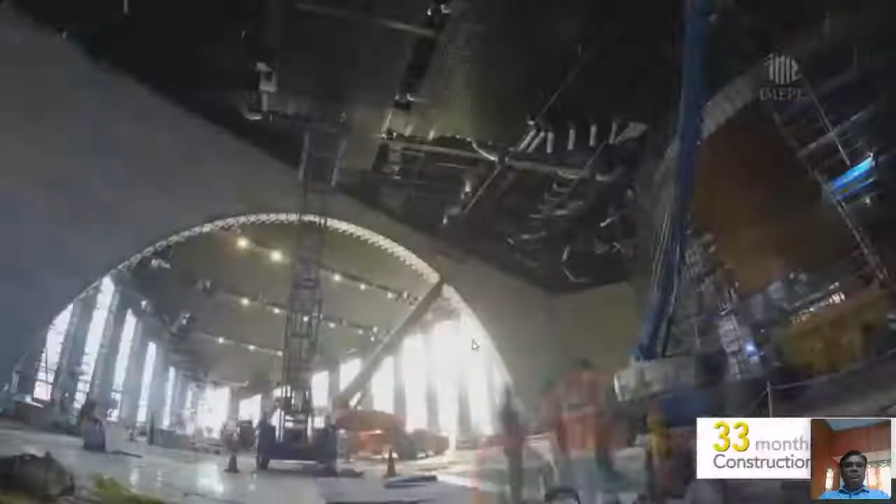The statue houses two 200-ton suspended tuned mass dampers to make it stable enough to withstand violent winds plus seismic activity. L&T created macro panel assemblies on site for the smaller micro panel bronze castings. This ensured speed and seamless assembly. Every plate was unique and RFID tagged and bolted in its place. As work progressed at blazing speed, the engineered structure transformed and the statue began to take shape.

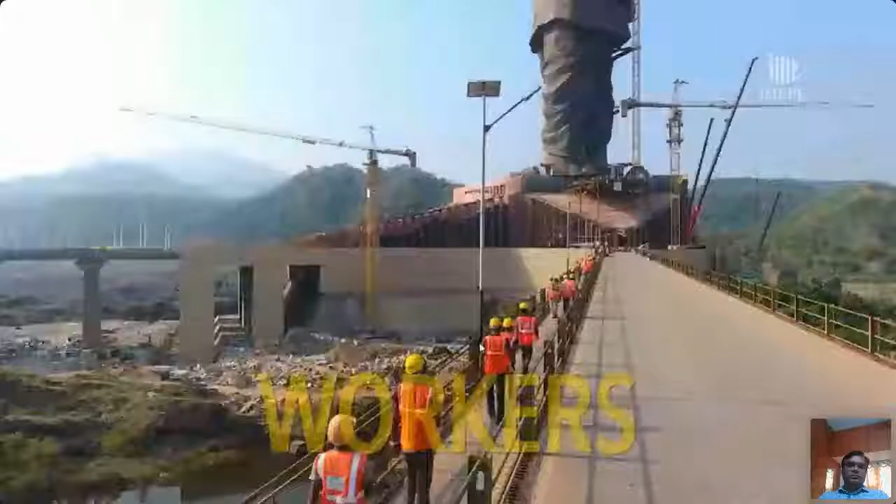Designers, engineers, experts, specialists, and workers from different parts of India have toiled night and day in a united effort unto one goal: the Statue of Unity, colossal enough to remind future generations of his epochal contribution, a structure as enduring as the vision of modern Indian nationhood. As Sardar Vallabhbhai Patel himself said, manpower without unity is not a strength. Only when harmonized by unity does it become a spiritual power.